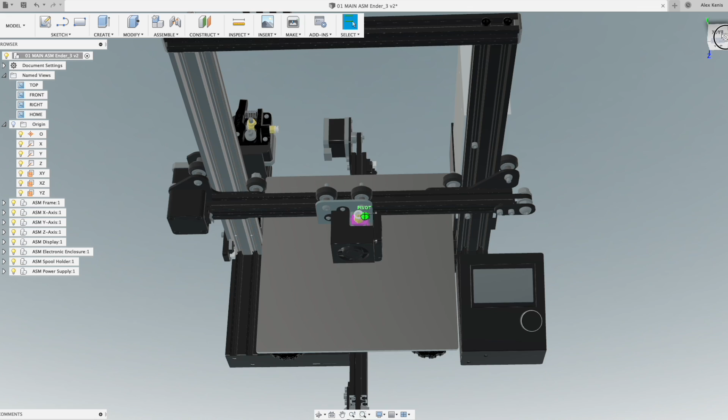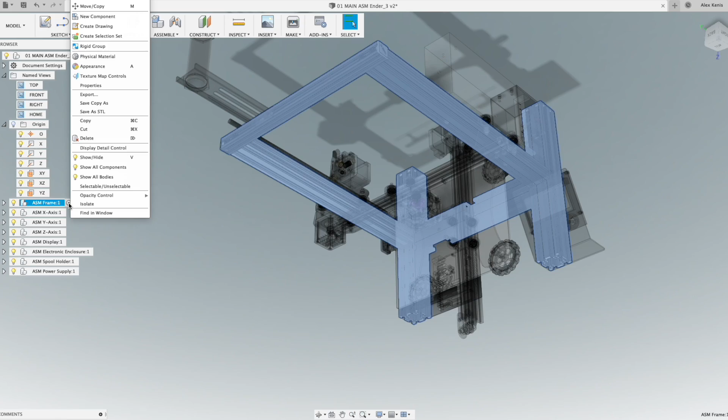This concept flowed from a few different places. One was my dear long-suffering wife saying maybe I should make simplified videos for people just getting on the ground floor, and then a separate tier of videos that are much more technical. That's a good idea, and I do that in Talk Nerdy to Me and the 5-minute data dumps, but I thought it would be more relatable to do a basic introduction to the concepts in the context of a popular printer, then spin that off into much more detailed theory documents with all the math and physics involved.

In terms of people looking for a cheap printer, it could just be somebody completely unrelated to the enthusiast sector of 3D printing who wants something to print tool jigs, fixtures, or rapid prototyping, and wants to get in on the ground floor as quickly as possible, then gussy up the printer a bit and see what the benefits and drawbacks might be. Also, in the tradition of hardware and software hacking — not like hackers in Hollywood movies with backdoors, but more like taking something you have and hacking it to do something it may not be intended to do — adding fancy pants features, unlocking fancy pants features, just making it work better, etc.

So that's for all you folks before you jump in saying, oh, Chinese junk printer, why don't you just buy a Prusa or an Ultimaker? Or when I get into board reviews, why are you talking about these $20 boards, why don't you just buy one of the new Duets? So, I did a live stream where I built the printer with as little preconceived notion about how that would go as possible.

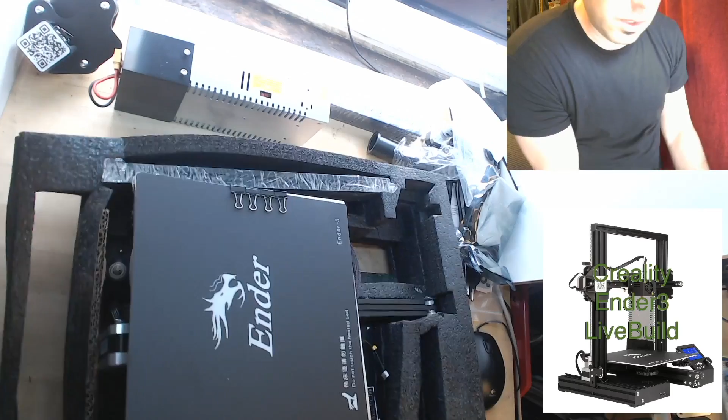We'll start off with the good stuff about this printer. The printer came very well packaged in some very nice fitted foam. Let me just say that this printer and a lot of printer kits these days are a quantum leap over what it used to be, like with the old RepRap stuff and the early kits that were just bags of bolts.

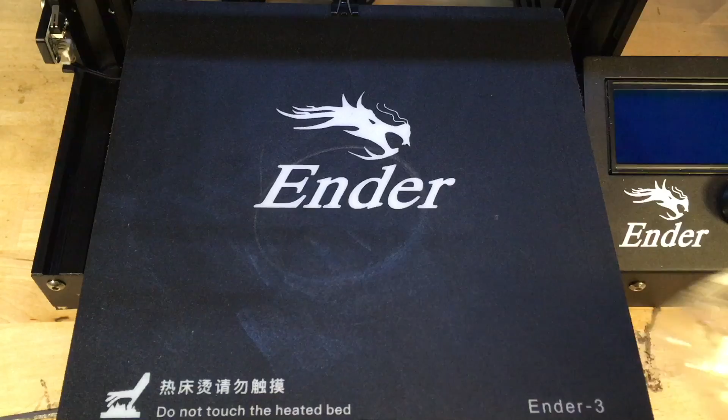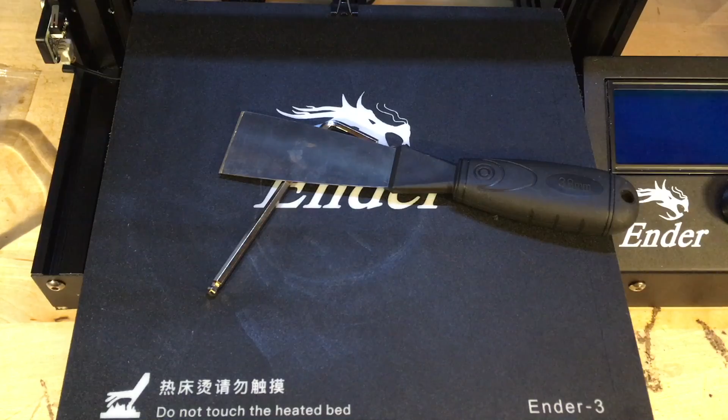First off, there's a whole lot of pre-assembly, and a lot of it is put into little baggies that are pretty clearly marked. There was a little bit of confusion with the directions, but everything did end up being in place. They're also kind enough to include pretty much all the tools you need for assembly and use—a scraper, lots of Allen keys, and assumably a current adjustment screwdriver. They've included some extras, which is nice because I definitely did drop a few bolts on the carpet.

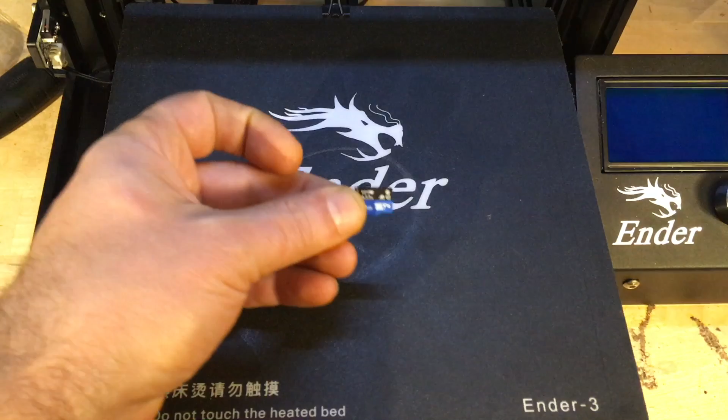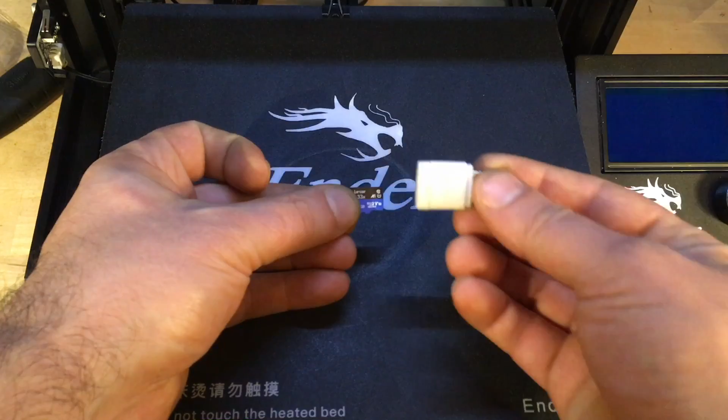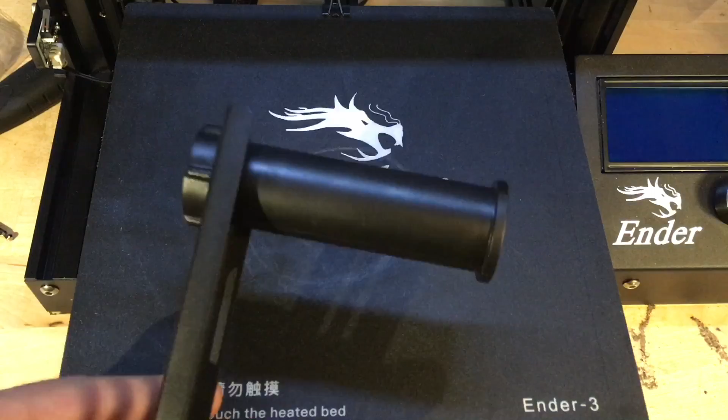And they also included a spool holder. Look, it's nice that they include spool holders in these, but this style is not the best thing in the world. I'll talk about that a little bit later, but it's nice that they include it in case you don't have anything at all.

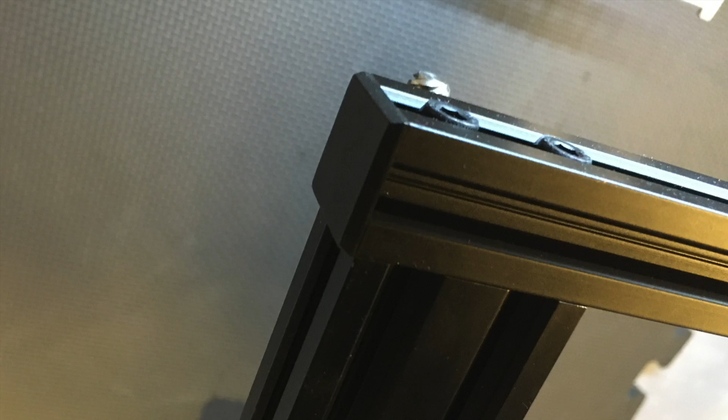Also, as like a safety nod to the younger crowd that might be using this, they do include caps that cover any of the corners of the sharp aluminum extrusions. That's a nice feature, and it looks like we finally moved beyond the days of exposed terminals on power supplies. You'd be hard pressed to get a probing finger in here to touch anything dangerous.

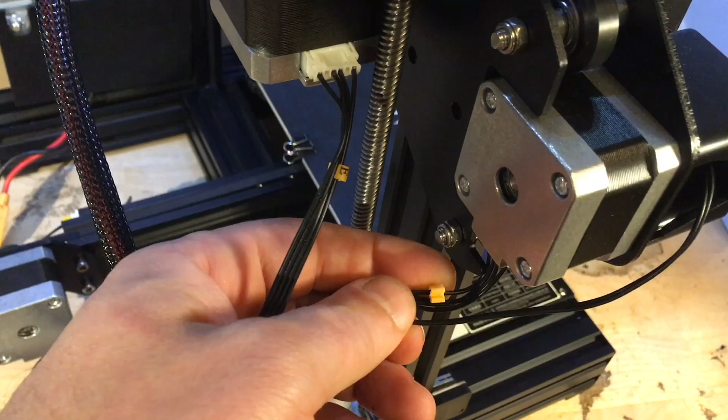I also appreciated the rubber pad feet, and these are nice because you can scoot the printer around. They don't pop off like they do with some printers. And the fact that they marked the wiring harnesses with the axis that corresponds to it, that's very nice.

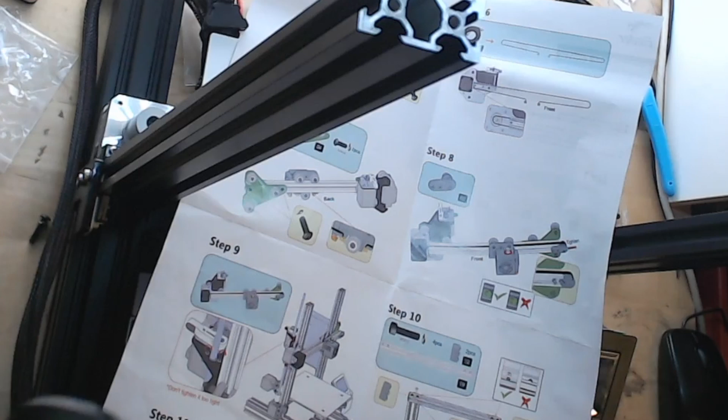Also, they used JST type connectors, and they disconnect at both the motor and the board, so you don't have to pull the electronics compartment apart if you need to unplug the motor to move an axis around or something like that. And there are also printed instructions in the box and PDF instructions on the card. They're a little sketchy, but we'll get to that a little bit later.

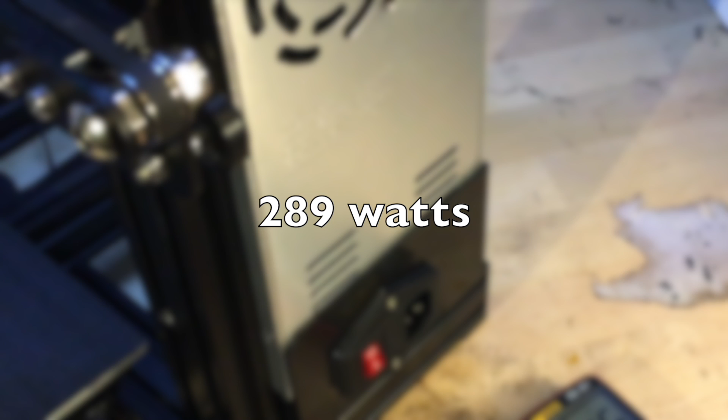In my regular usage, I never peaked over 289 watts of consumption from the power supply, which is a 360 watt supply, so that's nice. You have a little bit of headroom there. Although how much and how clean that power is, is mentioned in a different video.

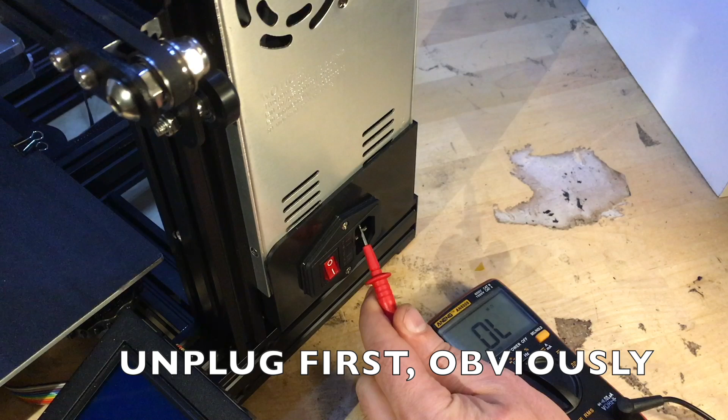And I said power supply, so let me get on to some of the bad stuff on my machine in particular. Now, I posted my quickie video on the safety ground for the power supply, so you can watch that if you want. The way that you would check this is take a probe and attach it to your safety prong, and then find a piece of metal that is definitely attached to the housing. If you have a very low impedance rating, a very low resistance, then you're good. If you have an open circuit, obviously that's bad. And remember that there is some kind of insulating housing on the aluminum of this supply, so you might have to probe a bolt or something like that that's threaded in.

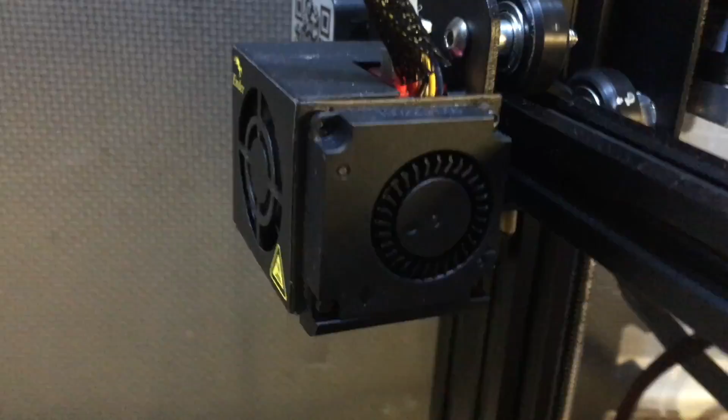Also, one of my screws popped out of the cooling fan and managed to make its way into the fan shroud here during shipping, which knocked off one of the blades. Actually, it broke one of the blades and I pulled it off just so I'd be able to print, which, as you can imagine, led to some horrendous vibrations like you can see here.

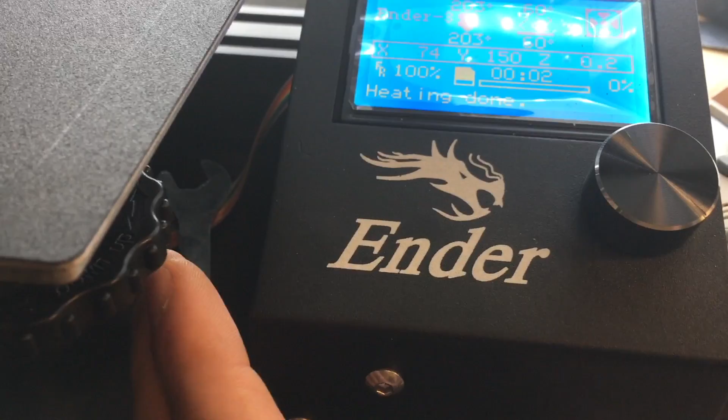Also, one of my bed adjustment knobs popped off in shipping and managed to wedge itself into the foam packing so that I couldn't find it during the live stream, but I did eventually locate it.

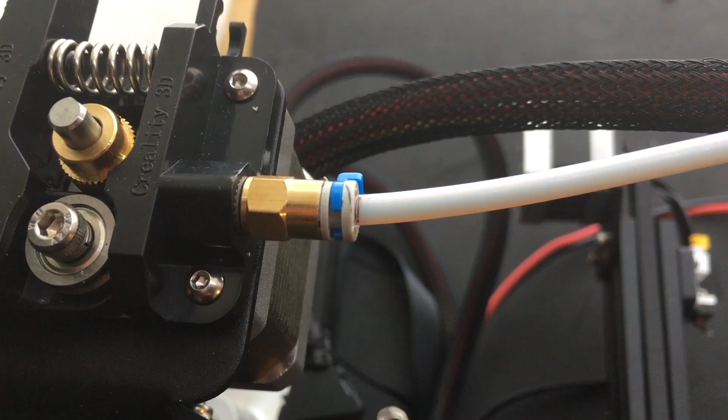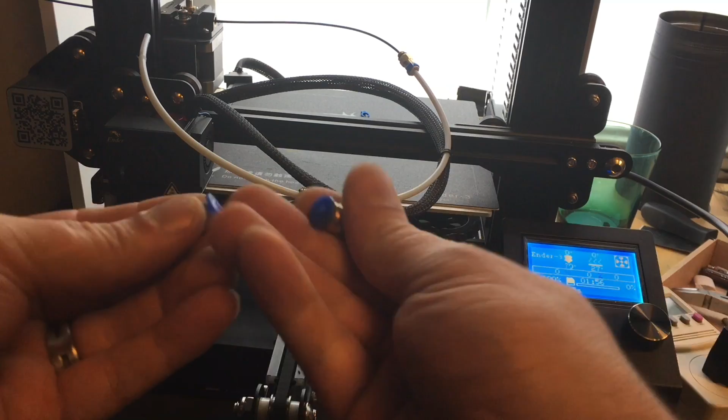The Bowden coupler in mine was also not great. You can see right here there's a lot of flex. So what that means is I marked this here with a little Sharpie so you can see that it's pulling in whenever it does a retraction. So that makes the whole connection a little bit spongy, and you would have to add extra retraction length to that. Now, these couplers are not inherently made for this type of thing. These are pneumatic couplers, and even from the same batch, one might work and one may not. You never know till you try, unfortunately.

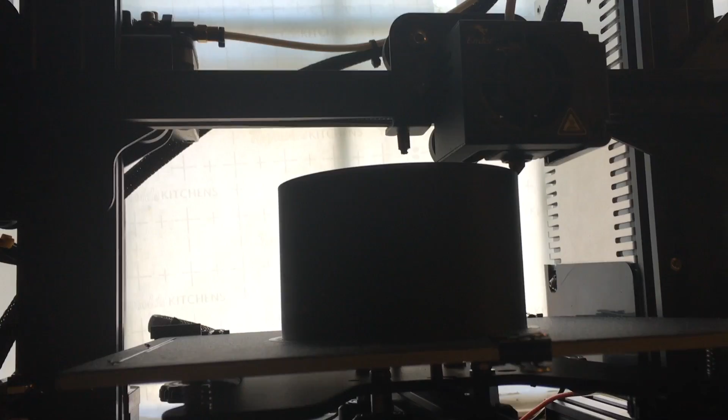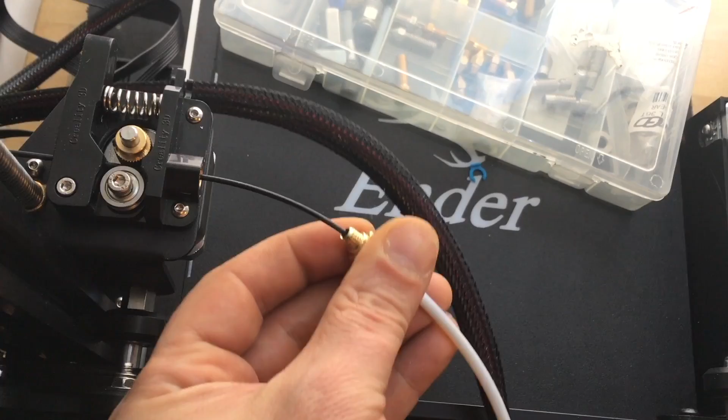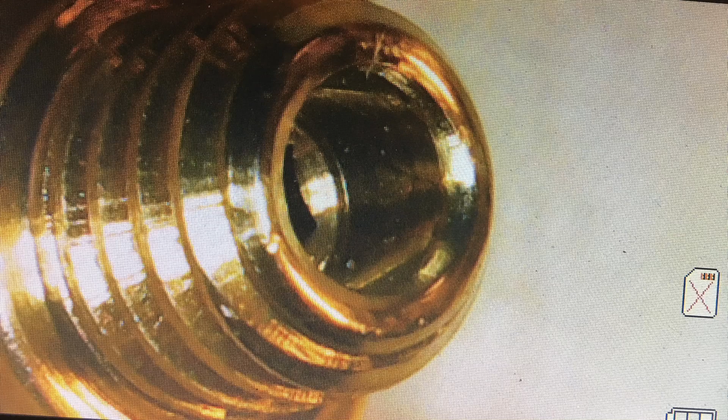And speaking of the tube and couplers, when I printed a full volume height cylinder, I got a little bit of under extrusion up at the top, you might say. Okay, it's a lot of under extrusion up at the top. And that was due to the angle of the Bowden tube pushing against the top support and then scraping on the filament. Now, this is a common problem because, as you can see right here, these are for pneumatics, not for something passing through it. So it's kind of a hex shape on the inside with a lot of sharp edges that your filament can catch on. So I have a little modification that I usually do to these Bowden couplers, and I'll mention that in one of the modification videos.

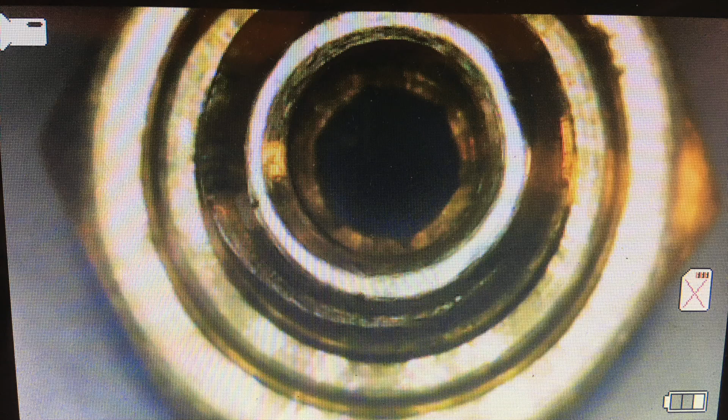As you can see here, I basically smoothed it all out and reamed that hole in the middle a little bit more so the filament passes through without scraping.

To test the kinematics, I just did some dry movements, without any extrusion or heating up the hot end. It was like a spiral vase that went all the way to the top of the printer, done the same way as any other spiral vase in Cura, just with all the extrusion stuff turned off.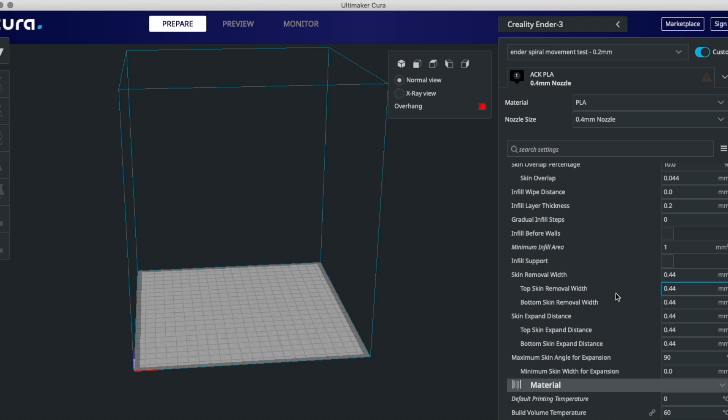One benefit of doing dry movements to test is that you can hear what's going on with the printer because the fans are turned off. I noticed my belts were rubbing, and you can hear that in this clip.

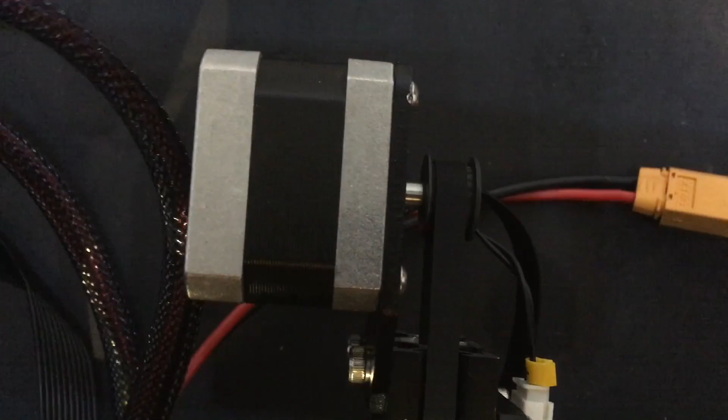Also, my bed was not perfectly flat. As I mentioned, it dipped a little in the back, so you can see that from where I printed this cylinder, and I had to sort of level that out as I went. It wasn't unprintably terrible, but it was a little bent.

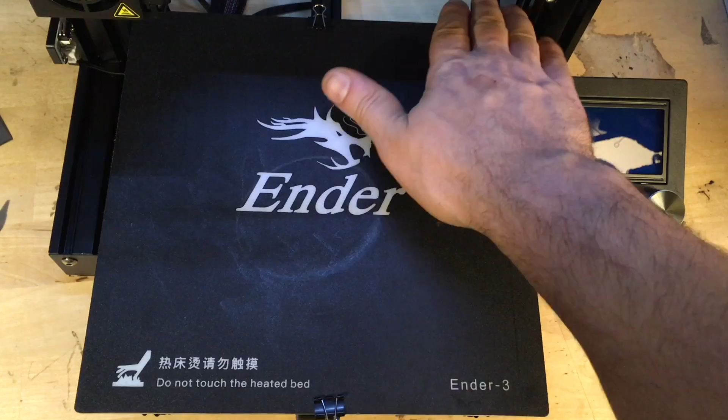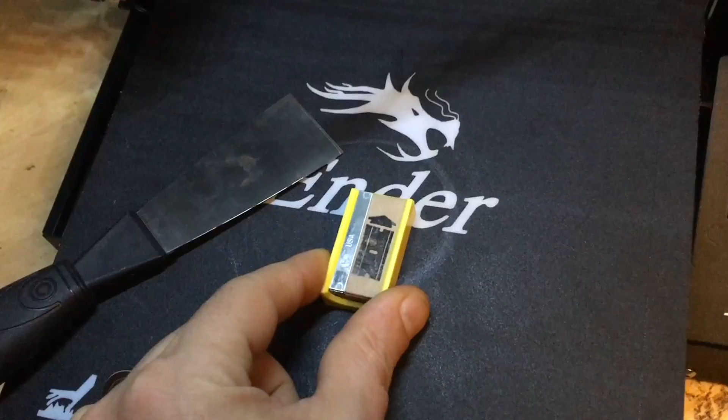Fortunately it has a pretty grippy print surface, but it's already starting to wear down a little. These types of surfaces aren't my favorite—you don't really need them for PLA, and this scraper is kind of insufficient for getting prints off, so I end up using razor blades and a little rubbing alcohol. I'll cover testing alternative print surfaces in a future video.

So let's move beyond just the issues on my printer and talk about issues you should be aware of that are common to all Ender printers, in addition to the previous section.

Let me talk a little about quality control, because over the years I've worked as a service manager for a couple different places. Part of my job was to revamp or develop the quality control measures for the service coming out of those places.

The important things I found were A, take out all the variables, B, accountability, and C, redundancy. Those were the three biggest things.

Taking out all the variables means developing a simple checklist of the major things, which can go through revisions as you find different things about the products you're sending out or servicing, so you make sure to add that to the checklist. It could be just five basic things.

Check the safety ground, check that everything's screwed in properly, that type of stuff.

Second is accountability. Something as simple as having someone initial the bottom of a checklist keeps them accountable to it, and lets you know whether it was done if they went down the list and signed it. Sometimes you'll have lazy, sketchy people who won't actually do their proper quality control check and just sign off on it, or they could miss something.

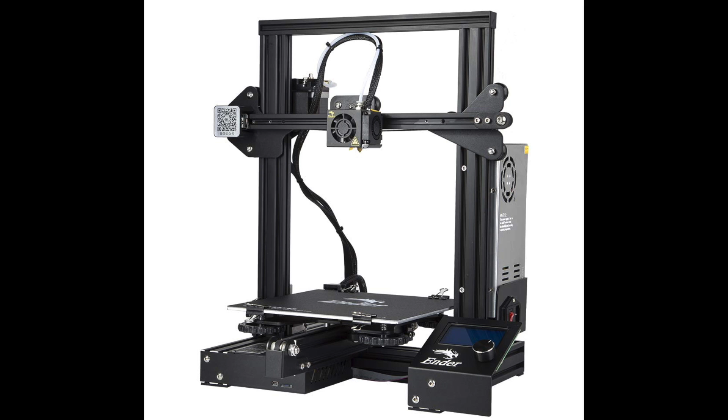Okay, so back to what we can do with our printers. You can pretty much run through your own quality control checklist. For example, check all the third-party parts—the power supply, the Bowden couplings, check the wheels for flat spots, all those types of things.

Also, something I don't really like is using simple friction to resist shear and torsional forces, because the tension of those bolts holds the friction of the gantry against the Z-axis plate, as well as using the same type of setup for holding the adjustment of the belt tension and the whole motor assembly.

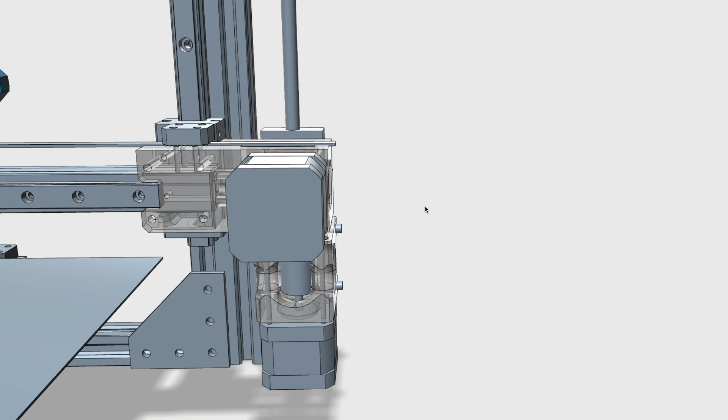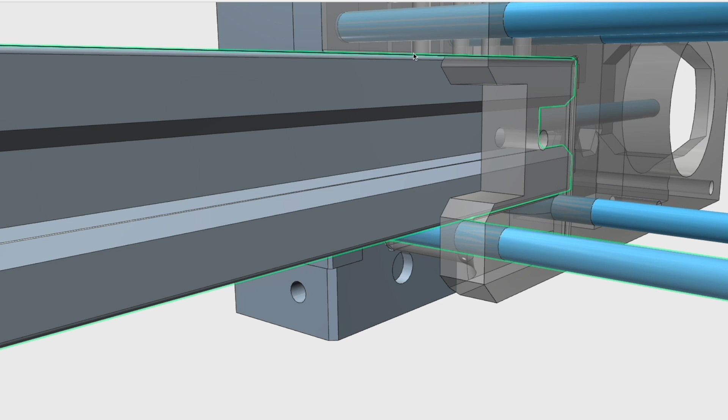I would prefer both a finer, screw-type adjustment to take up that slack, as well as something more rigidly coupled. If I may be so bold as to use a printer that I designed, if you look at the gantry, this was meant to use linear rails. The X gantry rests on bolts that go into the linear rail cart, so that's not going anywhere. Up top, we have a couple of bolts that hold that against it so it doesn't move, and on the other side there's a fifth bolt that bolts straight through to make sure everything is straight, flush, and pulled all the way against the back.

It's not a huge deal, but I would rather they adjusted this out of the factory so it would always be perfectly square and aligned, rather than having to fiddle with that whole process and worry about the tension of these plates against each other holding your adjustments.

Squaring and alignment, to me, was the biggest issue with the assembly of these printers. They don't have a procedure, and I don't know how they can reasonably expect you to do that out of the box. I've seen some absolute horror show pictures online of people trying to debug prints, showing a picture of their printer with the gantry racked at a ridiculous angle.

I won't include it in this video because it's going to run a little long anyway. I'll have a completely separate video for the procedure and modifications I did for keeping squaring and alignment, or I guess you'd call it tramming in the CNC world. I'll also include some alternative methods suggested by viewers of the live stream and other people online.

Also, I mentioned my Bowden coupler was a little bit spongy, but the scraping issue is probably going to be an issue on a whole lot of different printers, which is one of those issues that can give Bowden printers a bad name, but it's a real simple fix, and I'll put that in a video as well. Another thing I'll address in yet another video is how freaking springy these springs are. They don't have a whole lot of tension.

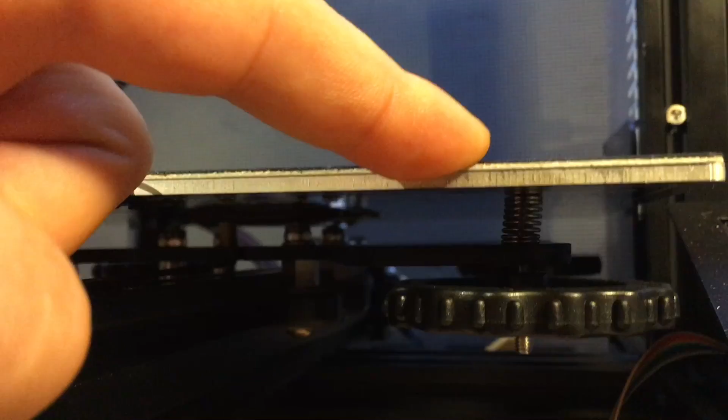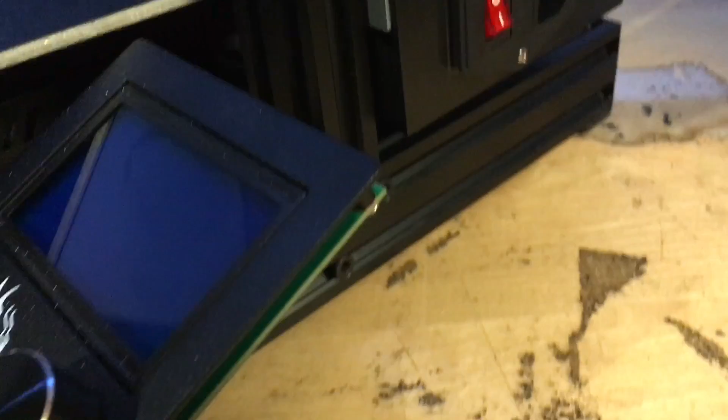Right here, you can see the power supply shroud, although it's nice, is a little bit flimsy, especially if you're pulling out that 3-prong connector and plugging it in again and again. It's probably going to crack, so use both hands.

Also, if I can be pedantic, this switch is upside down, technically. Down is usually off. That makes the most sense.

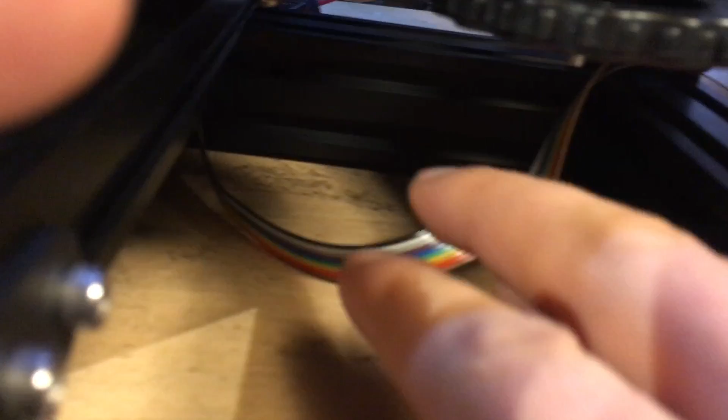Although the wire harness is nice and has this coating to keep abrasion from causing a short out or something like that, it is a little bit messy. It's easy to set your printer on top of them, and you have this little ribbon cable underneath that moves back and forth and can easily rub on your bed as it's moving.

Another thing we'll cover in some modification videos, this belt seemed particularly flexy for me. I didn't take it off and cut it up, obviously, because it has little grommets on the end, but I will be doing that in a future video, and we'll look into why those feel so flimsy.

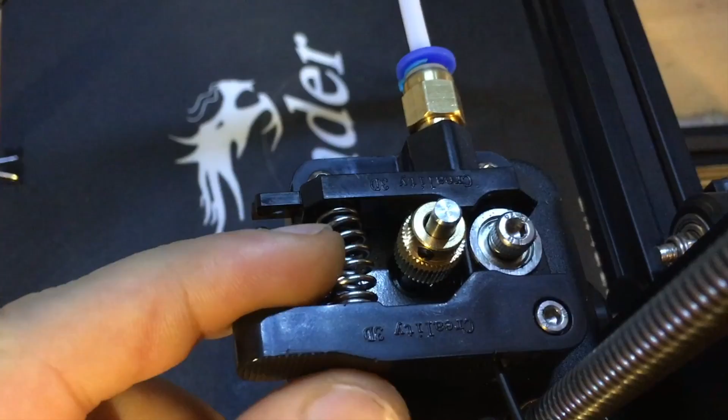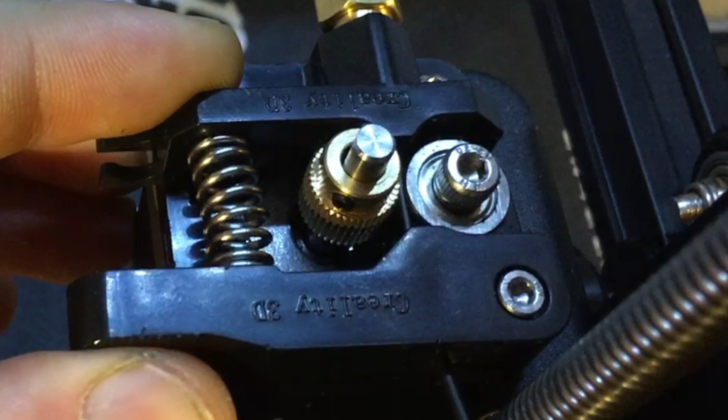As far as the cold end, there isn't any tension adjustment, so you just have whatever tension this spring is, squashing your filament with the pinch wheel against your feeder gear, and the feeder gear is not great. It's not terrible, it's fairly sharp, but it is brass, so it will wear out quicker than hardened steel. It would be nice to have a tension adjustment there so you're not causing your extruder motor to put out additional torque just because it's pinching too tight.

If I could be nitpicky, they used smooth bearings as rollers on the toothed side of the belt, which is not my preference. I don't know if there's really a big difference between using a toothed or a smooth, but I much prefer to use the toothed rollers.

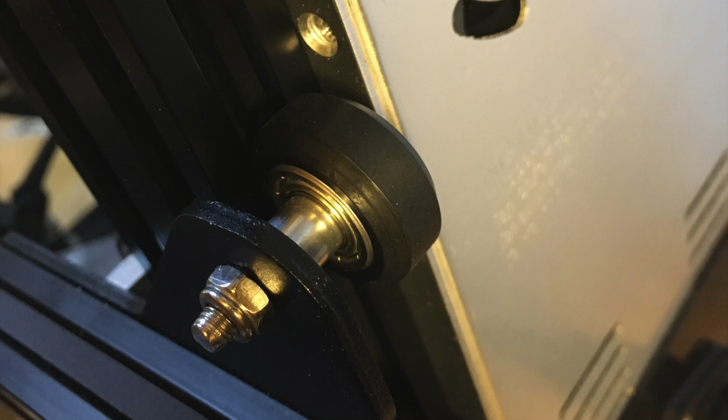As I previously mentioned, I had flat spots on my wheels from them being tightened down and then sitting against the rail during storage and shipping. It wasn't a huge deal, and it doesn't appear to result in print artifacts, but they are there.

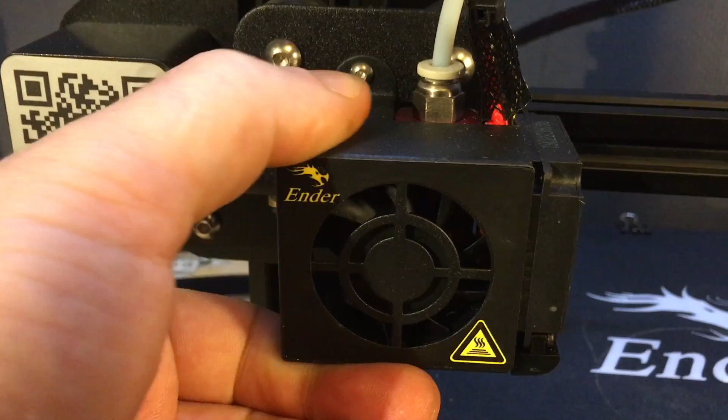This shroud is fairly flimsy and it does vibrate a bit even with a decent fan on it. Let me stop this quickly and show you some experiments I did with a fan. I took my off-balance fan as an opportunity to show you the artifacts you can have on a print in particular setups when you have a fan that's suboptimal, has bad bearings, or isn't balanced.

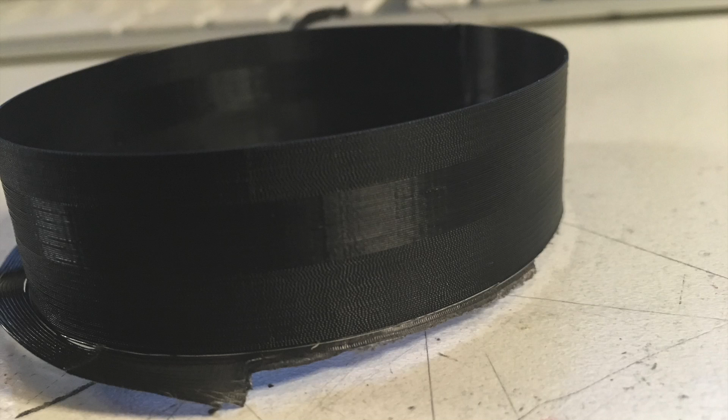So I did a print of just a spiral oval with the fan freaking out, then I stuck a bolt back in there to stop the fan, and used a handheld PC cooling fan to make sure the hot end didn't overheat and jam up the filament while I was doing this, then tested that for quality versus the other way. You can see right here the result of the vibrations the fan had on the print.

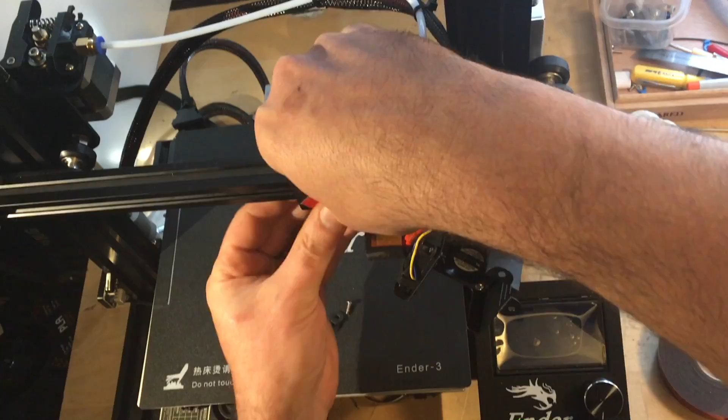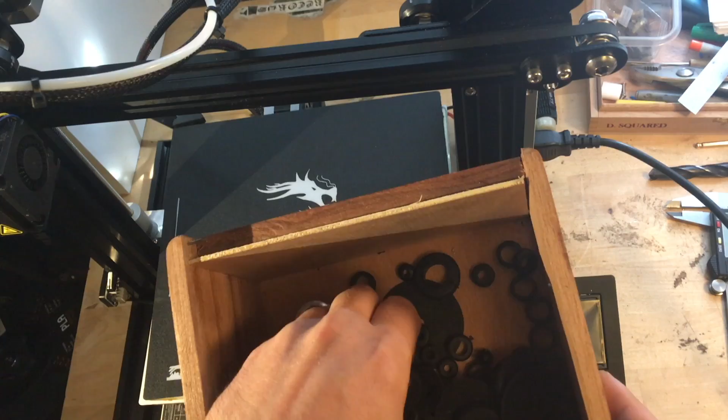I wanted to isolate all the fan vibration from the system completely, so I popped this shroud off, and then I took some VHB tape and mounted the entire cooling fan section to that so it would be fairly decoupled and damped by the viscoelastic effect of the foam. I also took some rubber grommets or spacers, whatever these are, and isolated all the other fans, isolated the power supply which has a fan on it, and the fan in the electronics housing as well. As you can see, the layers are much smoother.

I should say the extrusion is much smoother. So that's just a nod to using decent fans or mounting them in a way that they are decoupled from anything that's going to cause the hot end to vibrate while it's extruding. And yes, I will be looking into cooling fan options in another video.

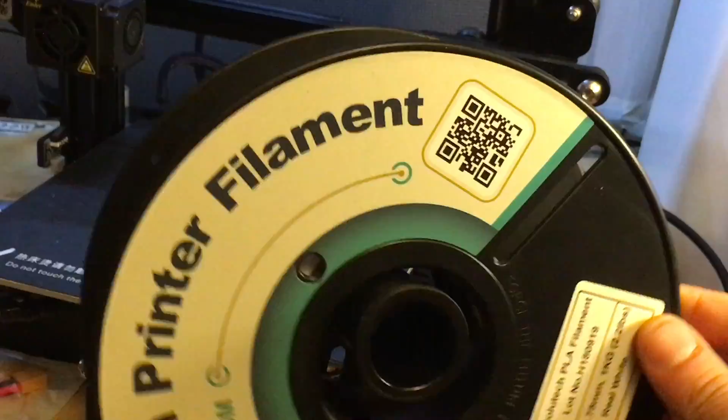Moving on to other things that could cause print artifacts, this type of spool, like I said, I did not use. I don't like these wobble back and forth type of spools, because when you have that motion back and forth, when it rocks and you're pulling it with an extruder, it's very possible that it can tug backwards in the reverse swing and cause under extrusion at certain parts.

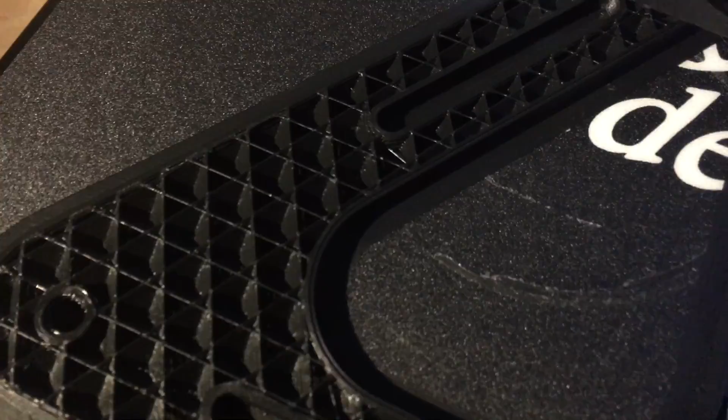So, not wanting to waste filament, I decided to knock up my own spool holder to mount on this, and I used that as a long-term print test to see if there was any kind of hot end heat creep. It took about 13 hours or so, and it turned out pretty well, actually.

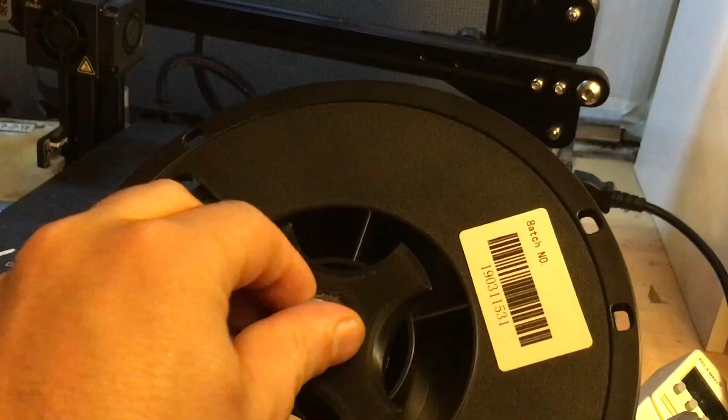My personal preference is to use ball bearings and constrain the movement in every axis except for rotational, and then be able to have a tension adjustment just by putting additional side pressure on those bearings.

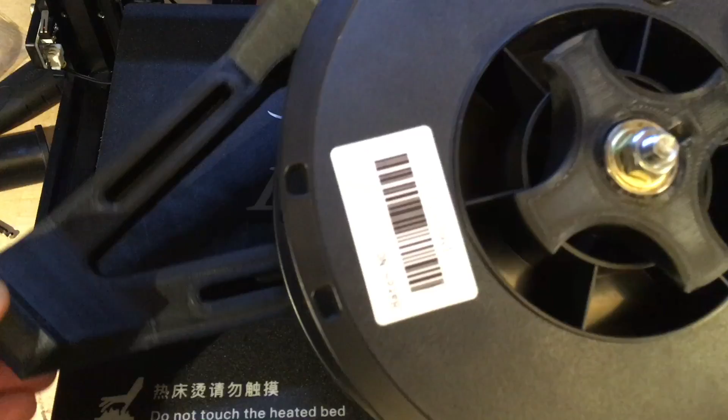Oh, and by the way, this is the filament I'm going to be using for all these tests. It was a super budget sale a little while ago, so I bought a bunch of spools.

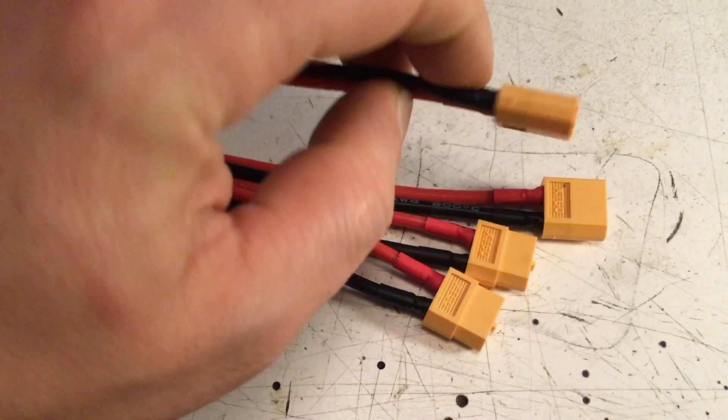Just one more thing I should mention with the electrical stuff: there's these XT60 connectors, and people either love them or hate them depending on what you're doing. I have a bunch of these around because they're commonly used in robotics and whatnot for quick disconnect power supplies. They are meant to carry a lot of current if you attach them properly.

These in particular are meant to be soldered on, and apparently in some early models they were crimped instead of soldered. Crimp-on power connectors are fine as long as they're designed to do that. Otherwise, you're not going to get proper surface area contact. You're going to get a high contact resistance, and then in accordance with Ohm's law, your connectors will heat up and either melt down or catch fire.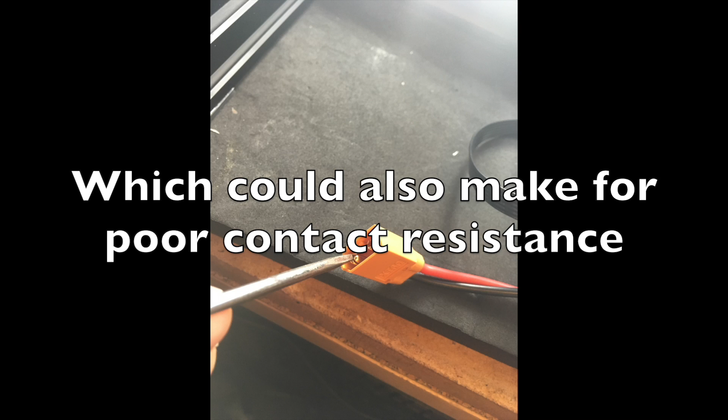Mine were actually fine, but I didn't like that they didn't hold as tightly as these types of connectors usually do, so I stuck a little screwdriver in there with everything powered down, of course, and spread the prongs a little bit so they make more positive contact and keep from popping out accidentally. But some general thoughts now.

Here's where I'm going to cover some things that would be nice for this printer and for the industry in general.

I'll ramble a little bit on some of these, but hit some things that I've come across in all of my use and discussions of printers that I think would be nice: better cooling design and better fans.

I already showed you the section where with off-balance, cheap, or defective fans you can get bizarre printing abnormalities that play into the customer's perceptions of your product.

Same with the cooling. This was much more of an issue back in the early days, but even now, good cooling that you've tested the design on can make or break general users' first impressions of prints. We know that if you have adequate cooling with PLA, things look nicer, bridges look nicer, details are sharper.

Technically this next one is met by this printer, but a safety ground for the frame, or anything you're going to be interfacing with on the printer, is important. The safety ground is so that if you have a short to chassis, you don't get an electrified metal enclosure that completes a ground circuit through your finger, giving you an electric shock.

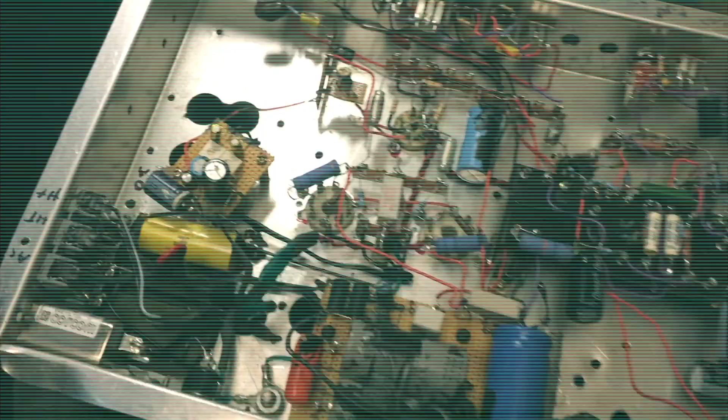With some of the other crazy mad scientist things I do, I know the importance of a safety ground. This one has 600 volts on it. If the safety ground were properly attached, since the power supply bolts into the frame, anything bolted into the frame is also going to be safety grounded. But since it's not, anything that happens with the power supply is coupled into the frame as well and gives you a shock.

I've seen a lot of printers where there's a separate power supply with no particular safety ground to the machine, and then they use like a mains power supply, like a silicone bed pad or something, which I wouldn't do.

Also, please include shorter test prints on the cards, something you've developed like a couple little gizmos and thingy-doos that people can do. You get a lot of mileage with 3D printing companies out of YouTube channels evaluating your printers and doing live streams.

But all the prints on the card take so long. I printed the little dog, where is it? The little dog monster thing, which was actually a really nice print. Let's see if it could... nope, it's going to be totally washed out. But this took like 6 hours, so obviously you're not going to do that on a YouTube video. You don't want that to be your first experience with the printer, just slowly watching this build up over 5 or 6 hours.

Along those lines, it'd also be great for you to pull down some calibration and testing demonstration prints. You could even use that as a selling point, say 'hey, look how great our printer does on these test prints we included' — things like overhangs, bridges, small lines. Cut that up, slice it, put it on a card as G-code, and have that as one of the test prints.